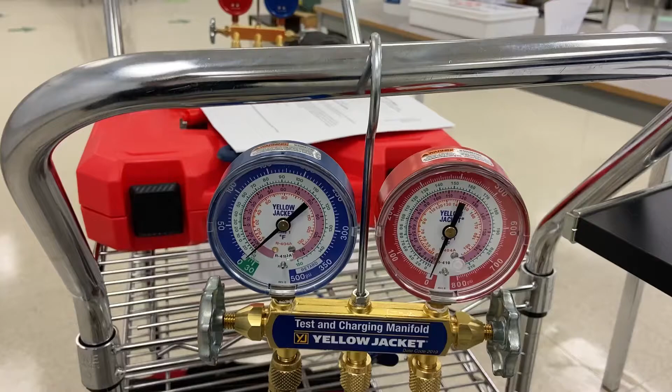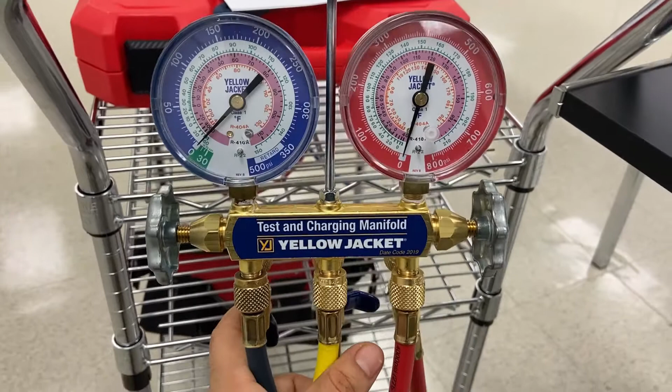This tool is called manifold gauge or service gauge. It's mostly used in air conditioning and refrigeration. When do we need this? When we service a system, when we add a refrigerant to a system, when you remove a refrigerant from a system or a cylinder, when you vacuum a system, you need this service or manifold gauge.

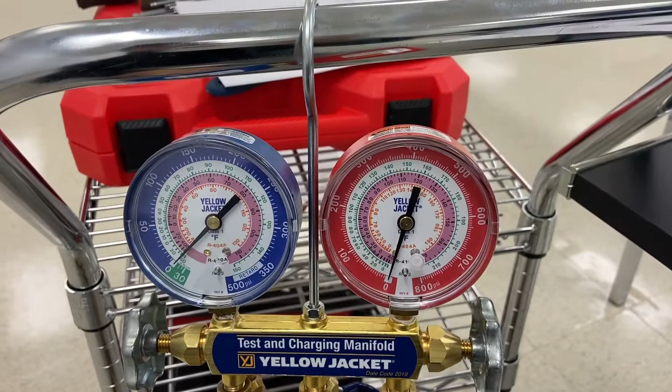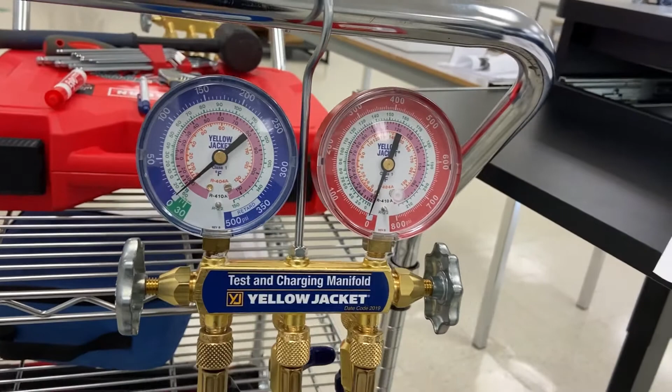This whole thing is called manifold gauge. This is the high side valve and this is the low side valve. Most of the time it's in red color and in blue color. When you connect your hoses, these parts are called hoses, red, blue. So red is connected to your high side. In here you can read the pressure on your system.

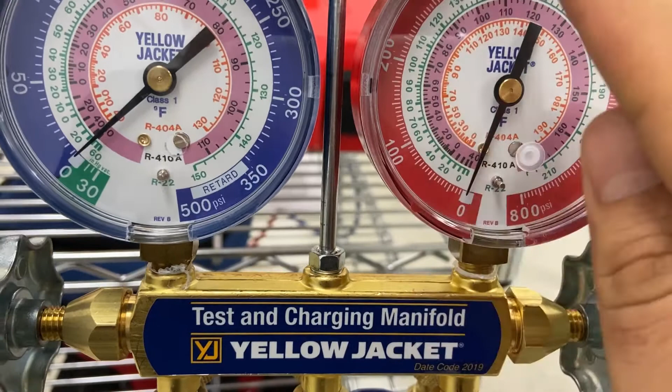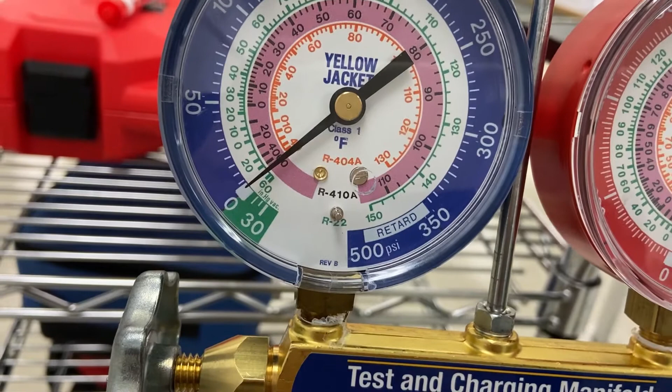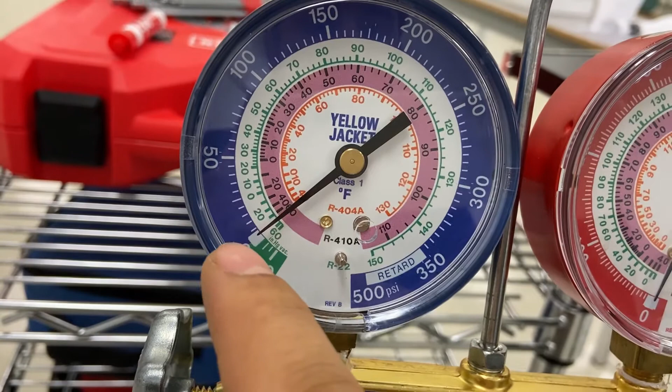So the outside shows the pressure, it's in psi, and the same thing on the low side you have psi, and also on the low side you can see below zero you have a vacuum gauge. It shows the negative pressure, measuring inches of mercury. So when you vacuum the system, this needle will come down. When you connect it to your system which has a pressure, the needle will go up.

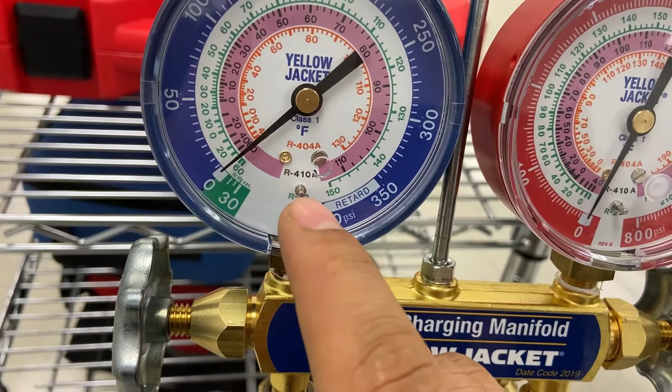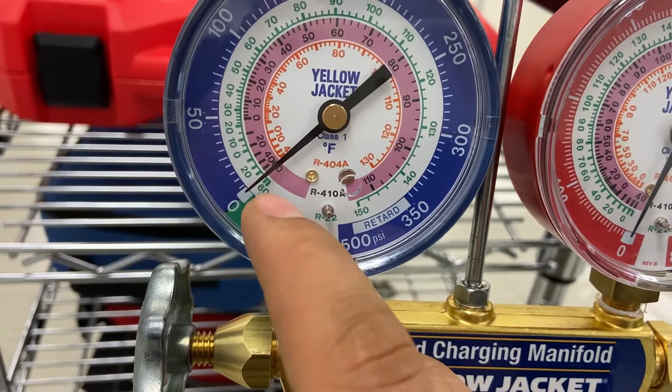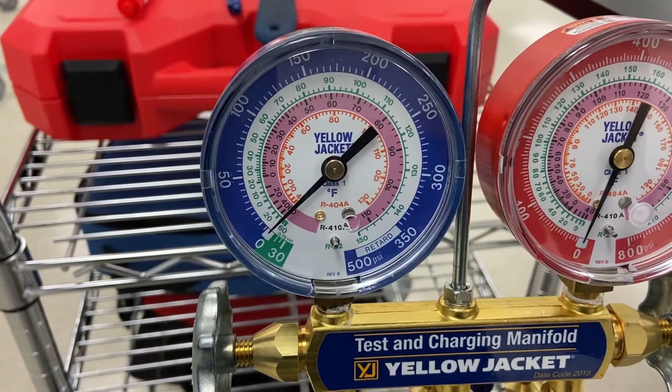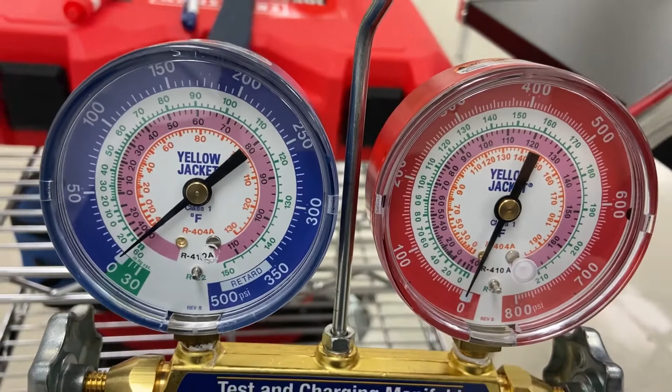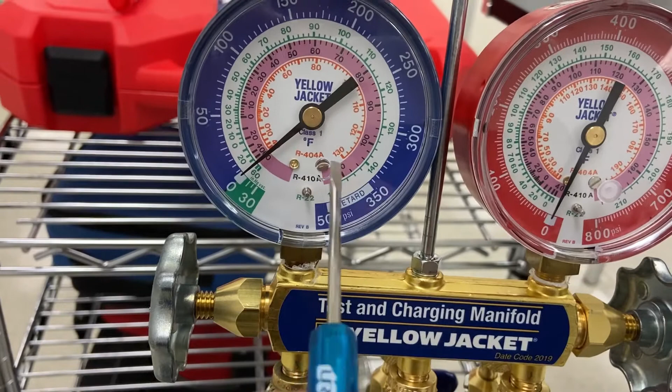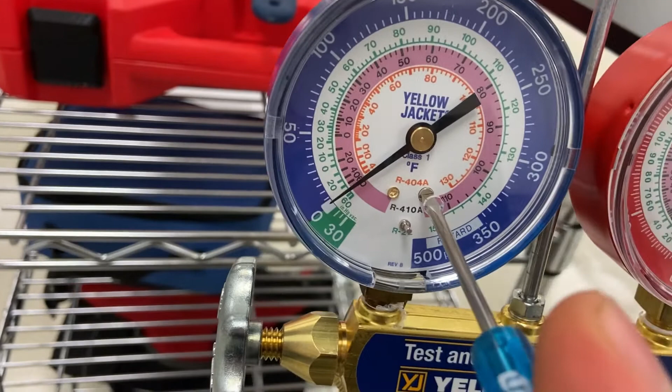And also from those needles, sometimes you can calibrate your gauges. You need a small screwdriver. You can remove this part and then put it in and adjust it. Once you put your screwdriver in, you can turn it clockwise and counterclockwise. You can watch it there. You can calibrate it from here.

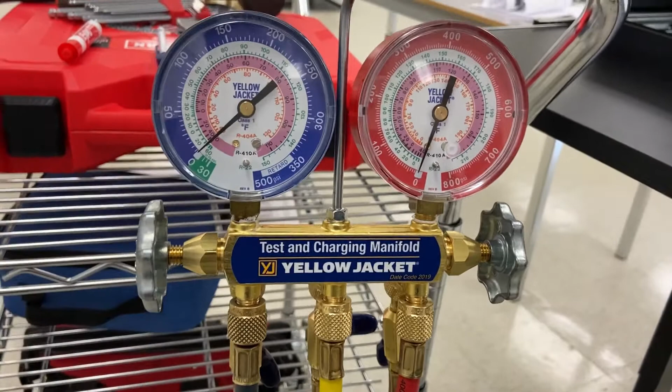This part is called a high side valve, and this is called low side valve. When you turn it clockwise, you close the valve, and when you turn it counterclockwise, you open the valve. When you close the valve, the gauge can still read the pressure in the red hose.

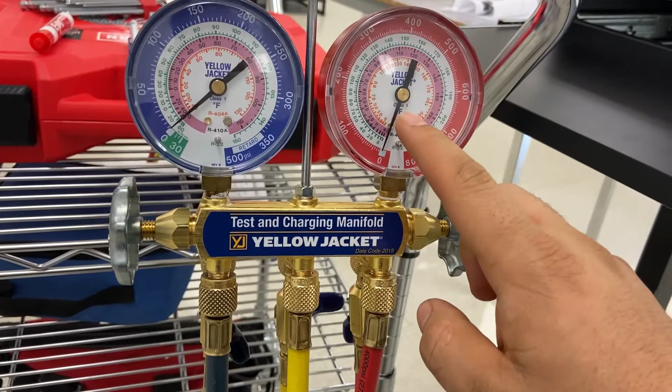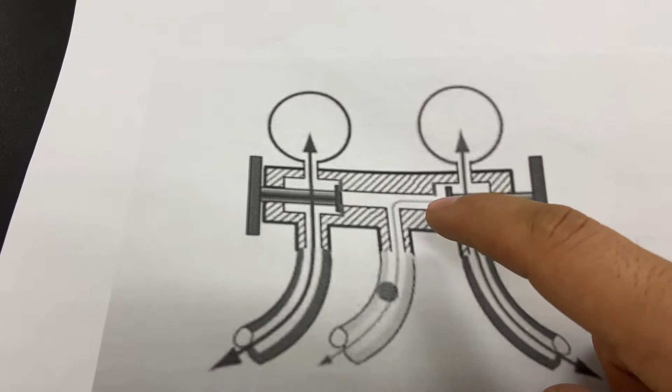If you look at this picture, this is the diagram of how it looks inside the valve. When you close this valve by turning it clockwise, it blocks the valve here. It doesn't allow refrigerant flow from the high side to the yellow hose, or back. But the gauge can still read the pressure from the high side. Same thing here, the valve is closed, but the low side gauge can read the pressure from the low side hose.

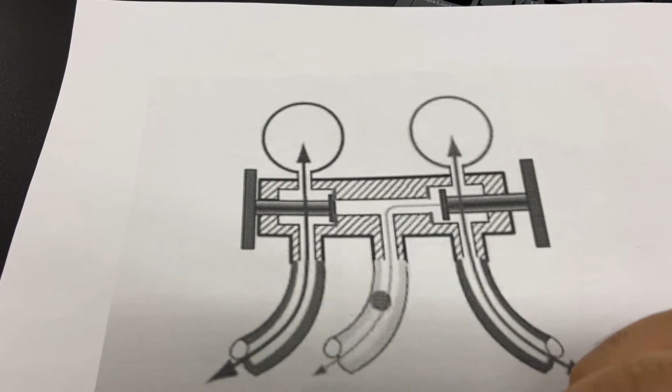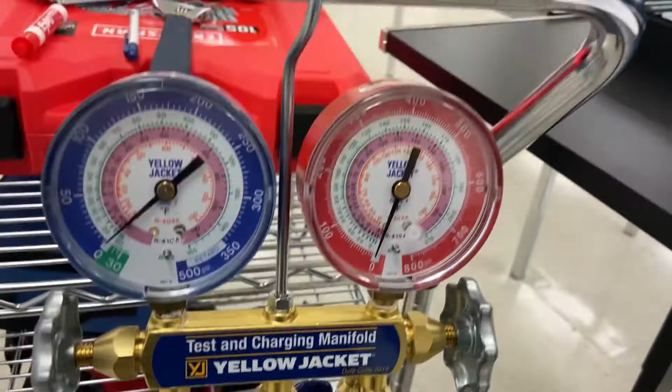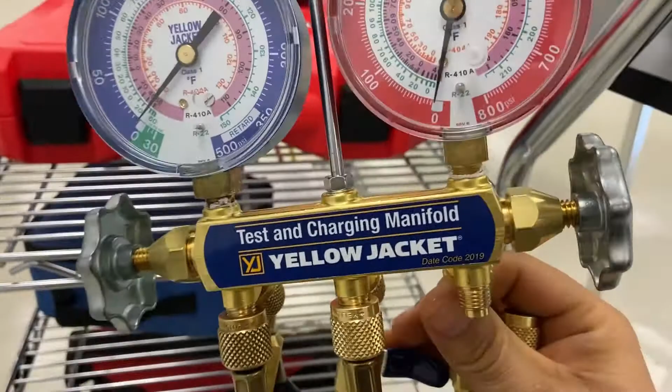If you open both of them, then the refrigerant can flow to both sides. So when you only need to check the refrigerant pressure, make sure to close both valves. And this part is called the manifold gauge body. These two sides are the valves, and the front side is connected with the hoses. If you open it, you can see a hole. That hole goes straight to the gauge, and you can read your pressure.

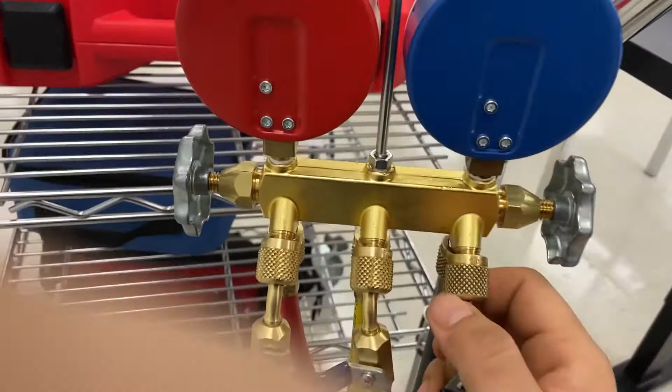At the back side, these parts are called port holders. The port holder is used to protect your hoses. When you don't need your hoses, you can put them here. It's a parking spot for the hoses, but there's no hole there. Its purpose is just to park your hoses when not needed in the system.

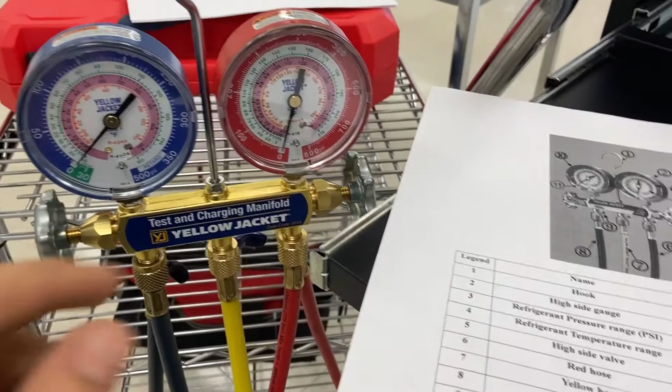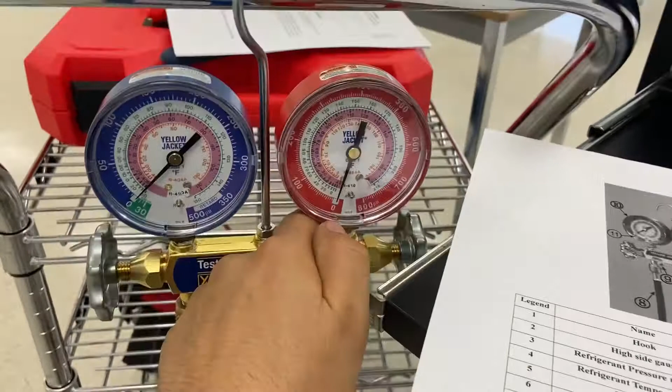If you check the names of the parts, the whole thing is called the refrigerant gauge. Hook, high side gauge. So this is called the hook, and this part is called the high side gauge. Refrigerant pressure range: inside the gauge, the outside is the pressure range, and inside is the temperature range, in Fahrenheit or centigrade.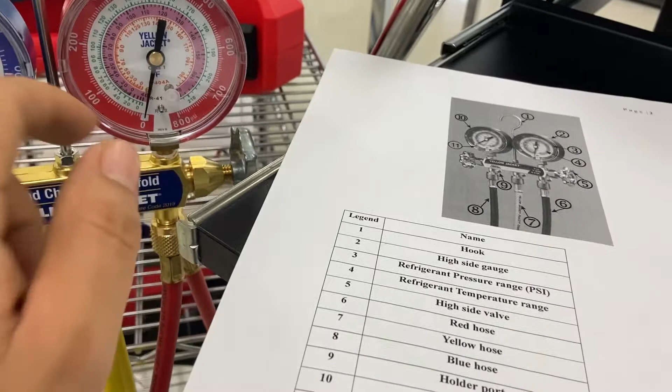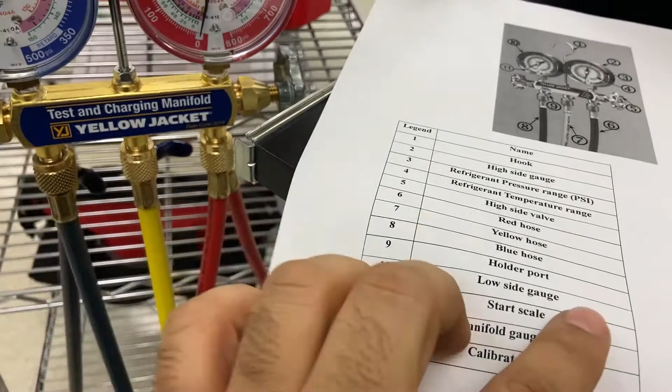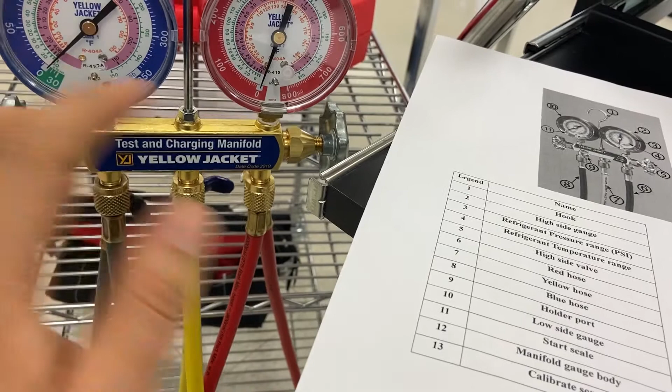High side valve. This part is called high side valve. Red hose, yellow hose, and blue hose are these ones. Holder port is in the back. This is called holder port. Number 10 is the low side gauge. This is called low side gauge. Start scale. You see the start scale is at 0.

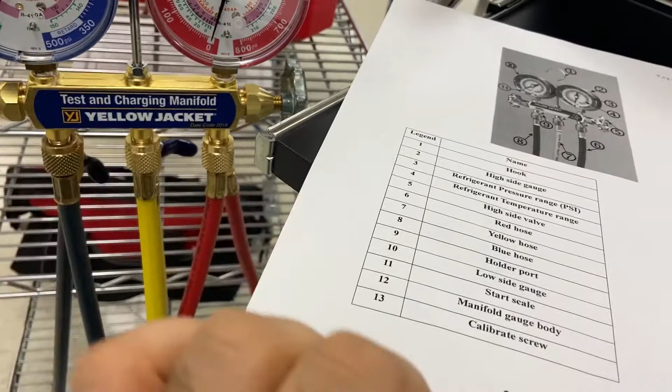Manifold gauge body. This part is called manifold gauge body. And calibration screw. There's a screw inside each gauge, so you can calibrate it with the screw. These are the names, and if you look at this picture, each part is named here.